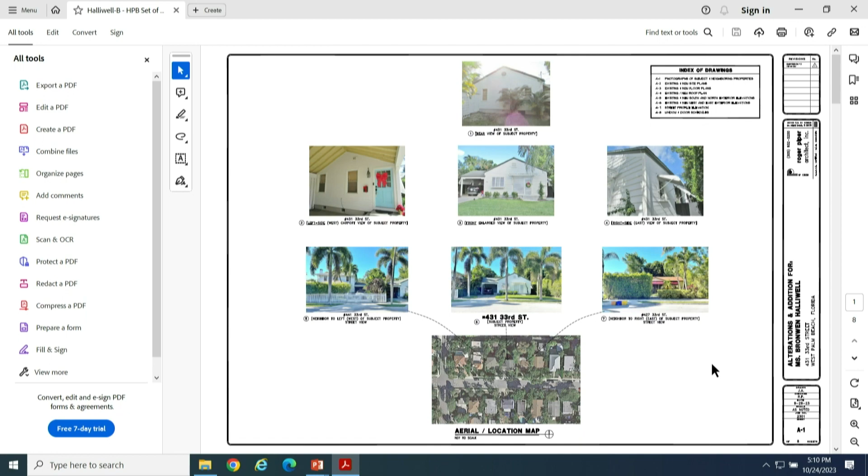The recommendation by staff was for a two-story structure, lowered by roughly 3 feet. However, the board suggested a one-story and or a detached accessory structure solution and wasn't in favor of any two-story solution during the presentation. We went back to discuss all input with the owners, and we are now proposing to you this one-story design.

As this meets the needs of the owners and accommodates the input and concerns by staff and you, the board, achieving staff's approval for a one-story building addition solution as designed is very important to us here. I'd like to do that. However, we're not in favor of staff's approval conditions for the following reasons.

Let's go to the rendering. Please refer to the rendering you might have in front of you. Here it is on the board. It will be obvious that the height of the new gable roof is not a significant issue, as it's barely noticeable when viewed from eye level across 33rd Street.

This is the existing home, existing carport. Lowering the new roof by 1 foot would reduce the distance the roof was raised from 2'5" to 1'5". This would create a very tight condition between the existing gable roof in the front and the new gable wall of the addition. This pertains particularly to construction means and methods.

Also, per the staff report, the additional gable intersecting—let me go back to the front—is referring to the small gable that extends over the new laundry room and ends at the existing carport. This roof area can be seen in the roof plan, on sheet A4.

You see that okay? I was going to blow it up. This is the existing, this is the addition, and this is the addition over the existing laundry room.

Also, you can see this in the south elevation on sheet A5. While this is a plan view depicting the elevation heights, the rendering is more accurate to understand when walking down the street or across the street. Due to the geometry of the building and the roof, in this area we do not believe that there is another roof profile that would work best with the existing roof.

Again, as you see in the color rendering of the front facade, the small gable is barely noticeable when viewed from eye level across the street, across 33rd Street. Therefore, at this time, we're asking for approval for this one-story design with no conditions.

Thank you. Thank you. Questions of the applicant?

Yes, I have a question. Can you talk about your reorientation of the front entry door? Let's go to the front. It's not centered currently, correct? It is not, this is existing. If you go to sheet A5, so you're installing it in the center and putting two side lights, side panels?

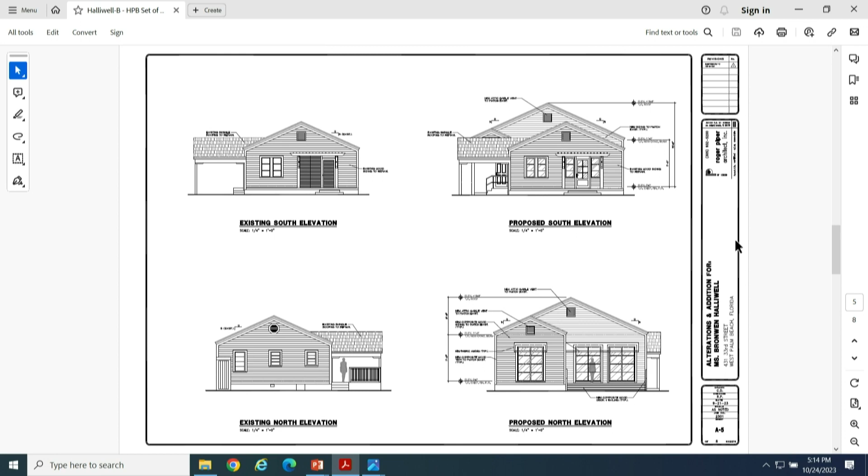Correct. Where do I increase the— the trellis element is an existing condition, right? How do I make this larger? The front trellis? There's existing, and this is new.

I'm sorry, your question? Maybe that's helpful. And so behind those kind of Bahama shutters, currently floor-to-ceiling jalousie windows? That's what's existing, right? And you're proposing kind of like a little knee wall and new windows—impact windows, not doors.

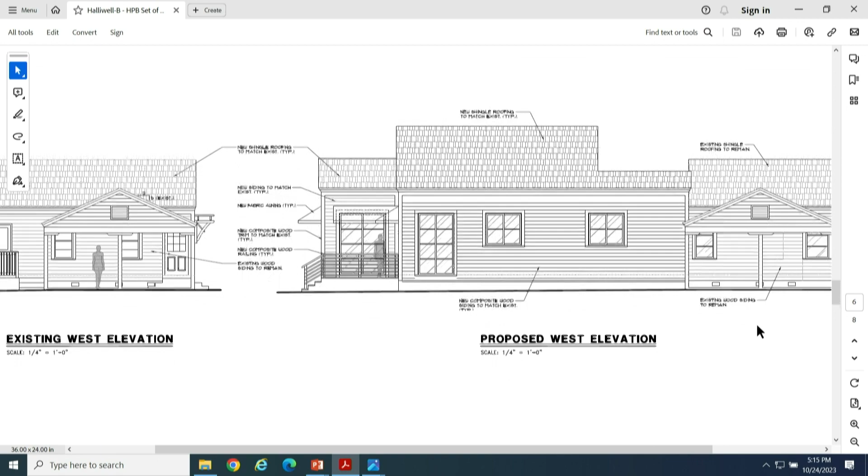Well, I think your improvements are just that, a great improvement from what the proposal was. I'm glad you really listened and your client was amenable to our input. I think the proposal is super. Terrific, thank you. Yes, I think that was well worth the exercise. Thank you.

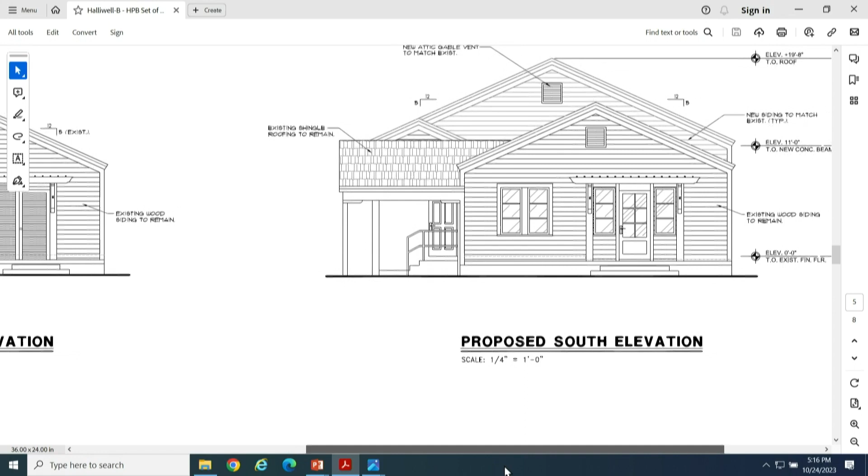Any further questions of the applicant? Yes, in the proposed south elevation, you are showing one type of railing, but on the other elevations you are showing a different type. Can you explain which one it is, please? Let me see—vertical or horizontal? Well, in the south elevation there is only one, that one. The one on the left has a railing that doesn't have the horizontal, only one horizontal, and the other ones are all different.

We'll take direction from you if you like. We'll just go by what code allows unless the owner has a preference.

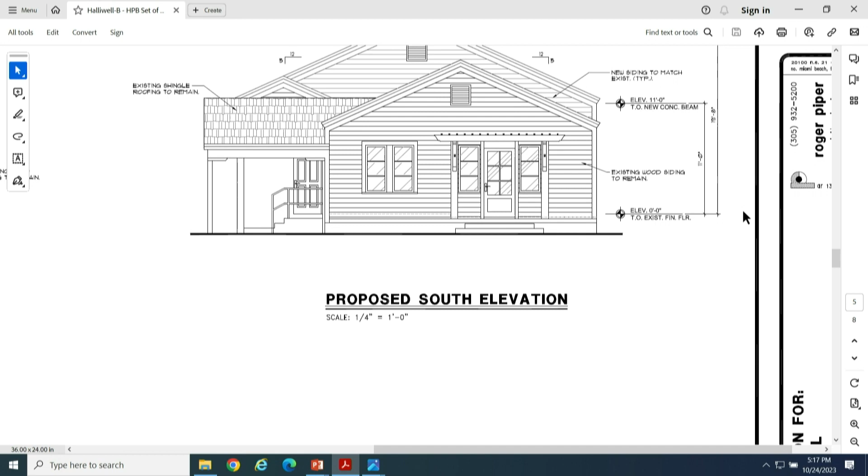And the other comment that I have is, would it be possible—if you look at the floor plan, where the new wall meets the old wall, usually what the guidelines call for is a differentiation there. So usually what we request is that wall is pushed back a few inches, not a reveal, but an interruption in the facade to show what is historic and what is new. Would it be possible to push that back?

To push it back, or how we're differentiating it is with height. Or with materials, but you are using all the same material now. I understand that you are changing the height there, but there should be a vertical differentiation also. And what's the example of how to show that? Pushing it back, meaning making a separation? Is making a differentiation in the wall—so instead of being on the same plane, one wall would be a few inches behind the other one. So the house will become a few inches smaller.

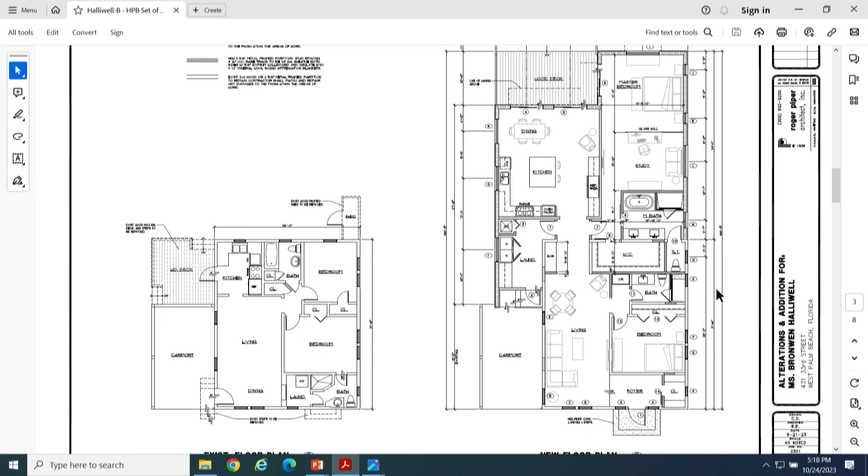In the past, Ms. Mittner had recommended a score line, not necessarily as best practice, but something acceptable. Given that this is a different type of exterior cladding, I think something similar could be achieved with the siding itself, not a corner board, but something similar to differentiate it. That way you're not having to change the overall structure to accomplish that.

I think that would be really important on the proposed east elevation, where the old wood and new composite are blending together. There's an opportunity for some sort of delineation with the addition, using different materials to separate the two. How confident are you that the existing wood and the composite will blend together?

And if not, what was the idea behind it? Maybe not trying to match the materials, but to show something different with material. Good point taken. Any further questions?

Okay, thank you. No, thank you very much. Thank you, I'm going to leave it on the very nice rendering. One more good look. There you go. Thank you.

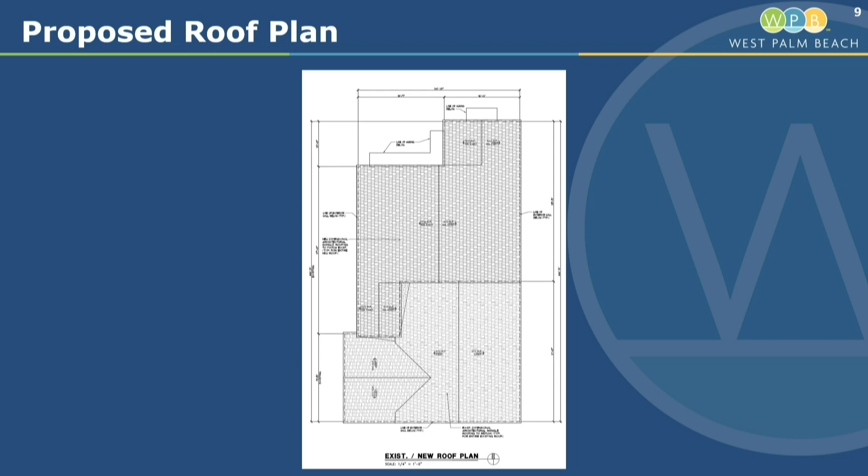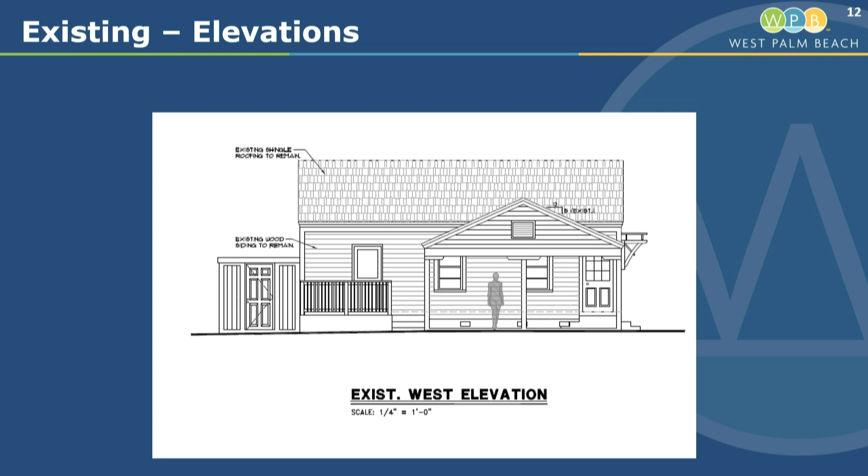This is the proposed site plan. As you can see, all of the additions are to the rear of the existing structure. The existing floor plan and the proposed roof plan, the existing elevations, and the proposed, where you can see the entire addition is set to the rear. The west elevations, north and east.

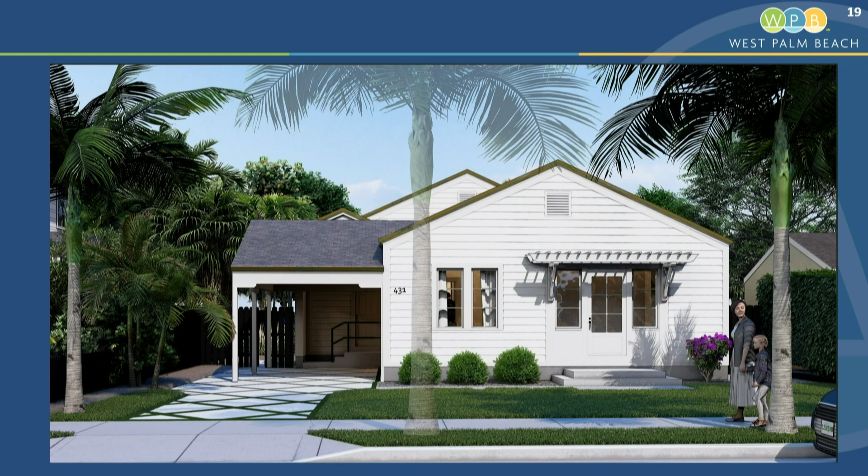And the streetscape, the home at 427 is a one-story, and 441 is a two-story, so this obviously fits in between those two heights. Here's the rendering that the applicant provided, and the rear rendering. We believe this does meet the applicable codes and the Secretary of Interior standards.

We are recommending approval with the condition that the applicant referenced. When that condition was written, I had not seen the rendering provided today. I think that if the project looks like the rendering, I would be fine with eliminating the condition. If it's going to look more like the elevations, I think the roof and height need to be restudied. But with the applicant's guarantee that it'll look more like the rendering, I'm okay with eliminating this condition. Thank you.

Questions of staff? Okay, thank you. Do you have any members of the public who wish to comment on this project? Seeing none, we'll go into executive session. Any discussion, or would someone like to make a motion?

I'll just add that I do feel the rendering is convincing in terms of the gable condition, as Ms. Hamilton mentioned, so I don't feel that needs to be a condition based on the evidence provided. It sounds like we're looking at two conditions at this point: one, an expression in the cladding of the addition to differentiate the old from the new, and two, a consistent railing design, which I think would be fine if staff just reviewed it once the applicant makes a selection.

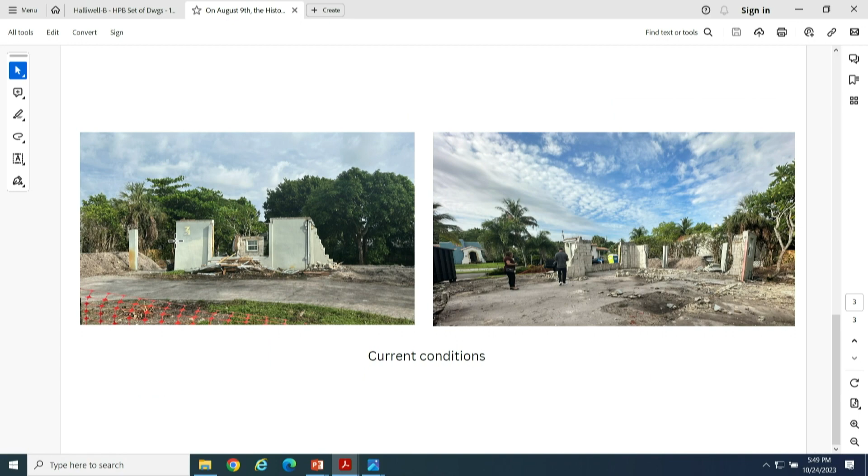Yes, I understand what you're asking. So this photo on the left—is this right here? It's like a little miracle that portion of the wall remained, which is the one portion of the wall that your proposal had the integrity to keep. Correct. Because honestly, I think the proposal really didn't do anything to highlight the historic nature of the contributing structure, in my opinion. I remember when this came before this board.

That said, now that you're kind of free of the confines of the perimeter of the walls, is there a better plan that your team has come up with? Maybe one story, now that you're not bounded by walls that no longer exist, or put in an addition? No—we're actually very happy with the final approval. We spent many months here in front of you and listened to all your advice, and I feel like we accommodated a lot of the requests and ended up with a result we're happy with and proud to contribute to the Flamingo Park community. So we'd like to continue with the original approval.

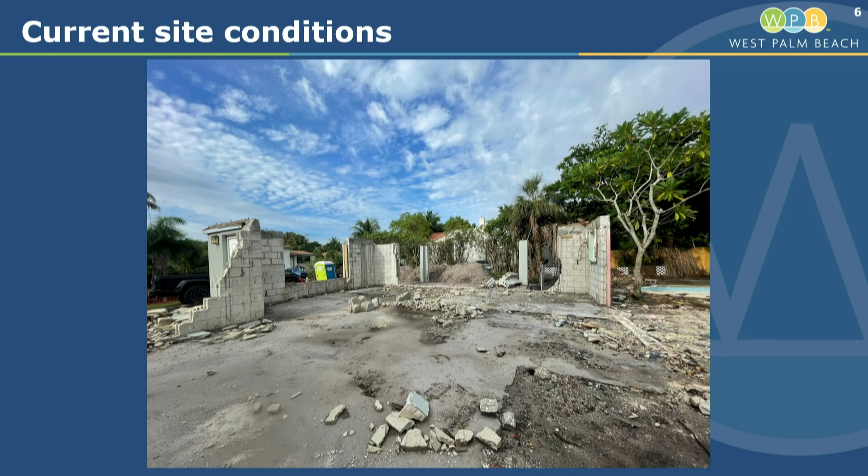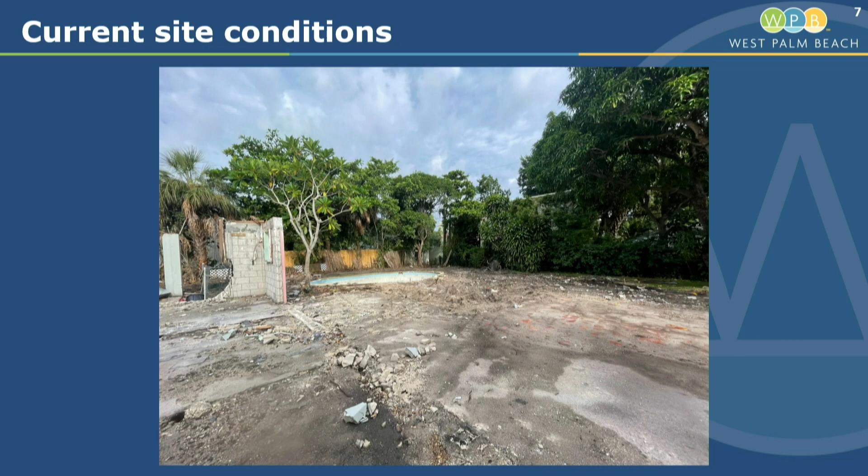This is the current site condition, where you can see mostly that front bay window portion, and a few of the columns from the carport are remaining. However, pretty much everything else of the building was demolished prior to the building inspector stopping work on the property.

The front door is remaining, and not much else. You can see what the applicant was showing, that there clearly was some problems with the walls, but it's hard for us to know without those walls currently existing.

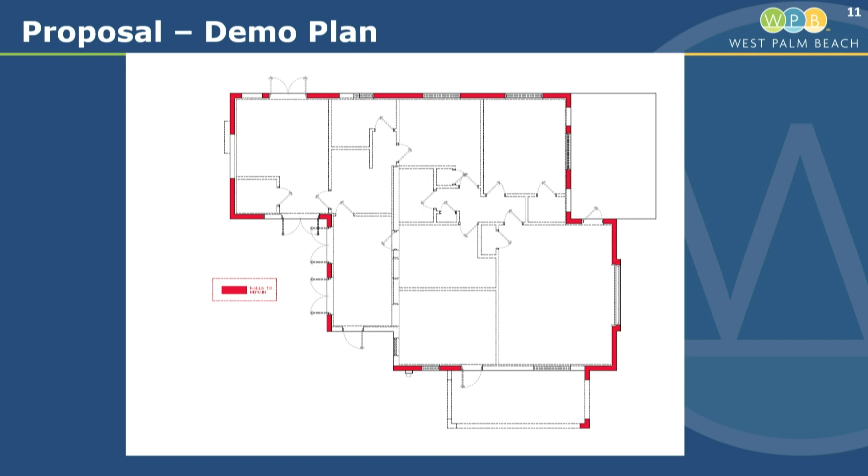This was the proposed demo plan, which again showed in red all of the walls that were to remain. And this is the existing conditions, where really only the front small portion and carport were retained.

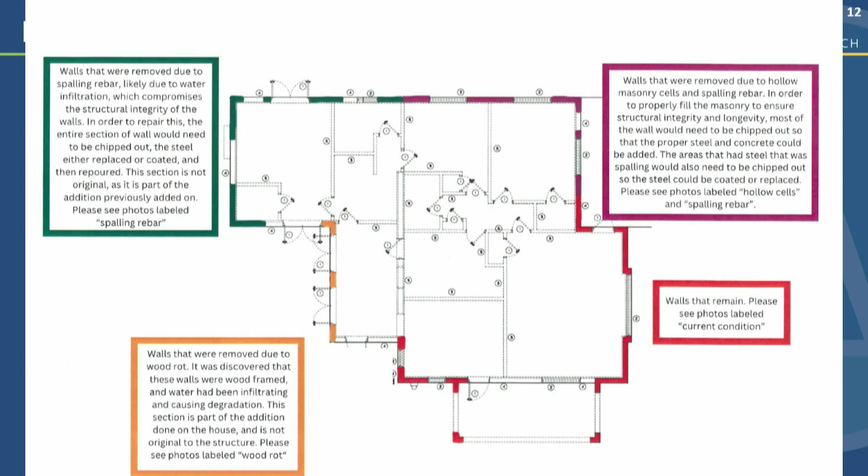This work was all done prior to the issuance of a building permit. Historic had not signed off on their final permit. Therefore, any work that was done was without the issuance of a permit. Although they did go before the board for approval for this project, it far exceeded the scope of what was originally presented.

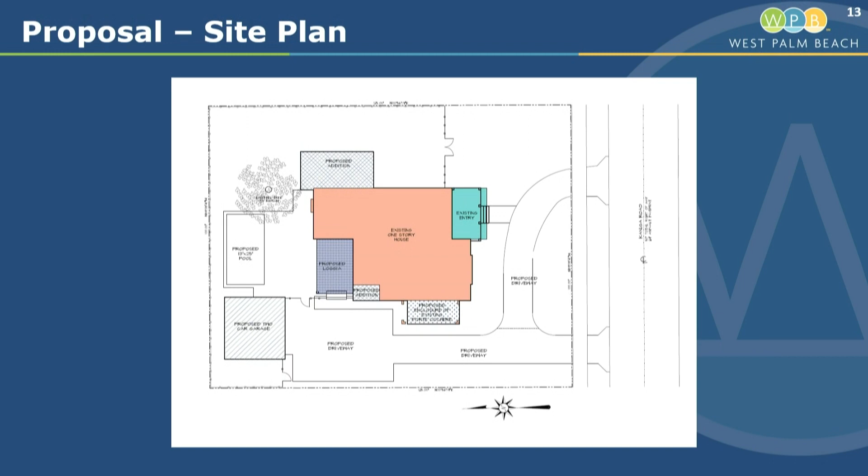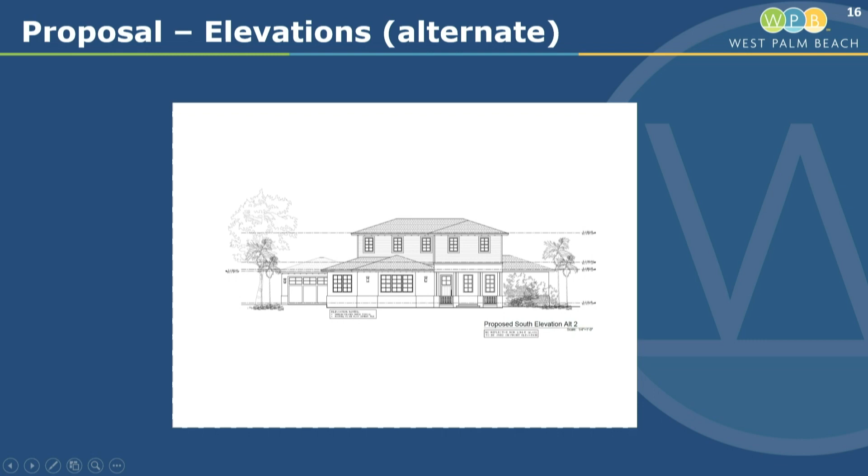This is the approved elevation. As you can see here, that portion of the home that was called out was probably the most prominent portion of the home to remain. But there were still some walls that we were supposed to retain.

Just a quick timeline. Originally, in January 2022, the applicant came before you for case numbers 2206 and 2207 to completely demolish the home, split the lot, and construct 2 new homes. This was denied by the board.

They then came back with the approval that I just showed you. That was heard in August 2022, September 2022, October 2022, and November 2022. It was approved at the November 2022 meeting.

The applicant did submit for building permit in May of 2023. I will say they were pretty close to getting it issued. When they did the work prior to receiving the permit, on October 4th it seems their crew came in and demolished most of the walls.

The building department did cite them on October 5th for complete demolition of the home without permits. And also, Historic did add demolition by neglect, since that's our main code section that we can cite them for. As you can see here, these are the 2 sections of the Historic Preservation Code that they were cited for.

Section 9448E: Maintenance and repair of designated properties required. All designated properties, which this is a contributing structure or any portion thereof, shall be preserved against decay and deterioration and kept free from structural defects. I believe that demolishing the structure probably doesn't fall under that.

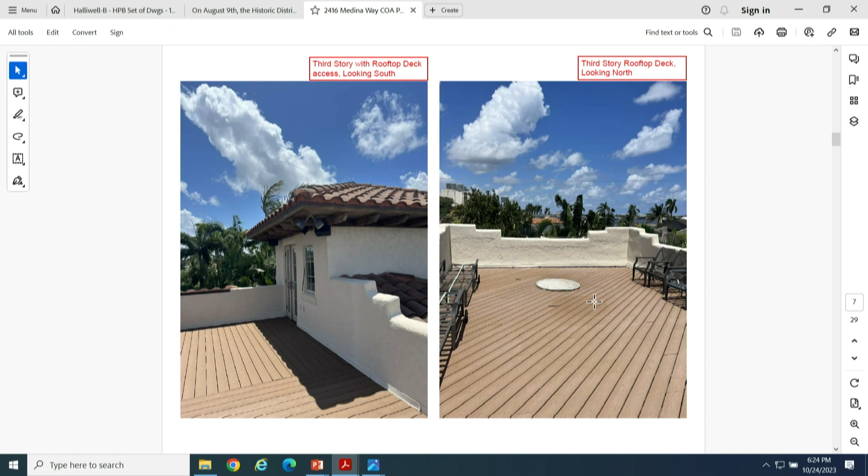It's actually pretty well buffered line of sight — they only get a clip of the water looking northeast. There's new construction going up on the east of this property, as well as the west, the northeast, and the southwest. This entire area is getting redeveloped, or let's say it's changing.

I'd like to let Walter describe the design precedents as they relate to this project.

Good evening. So as Russell briefly mentioned, one of the goals of the project is to actually expand the third story habitable space over that roof deck to make it a little bit more usable. There's also a proposal to extend the second story, which we'll get into shortly.

Just want to briefly review some design precedents. I know third stories are not the most abundant thing, but they do exist in the neighborhood, and we have a few examples to share. This one is the furthest, but it's larger than our proposal, at about 400 square feet approximate. This information is taken from Google satellite imagery, Google Street Views, or our own personal photos, but the measurements are relying on the satellite.

This is 211 Grayman, a third story. This is on Flagler, another third story, almost 300 square feet. This one's close to the property, at 380 feet away.

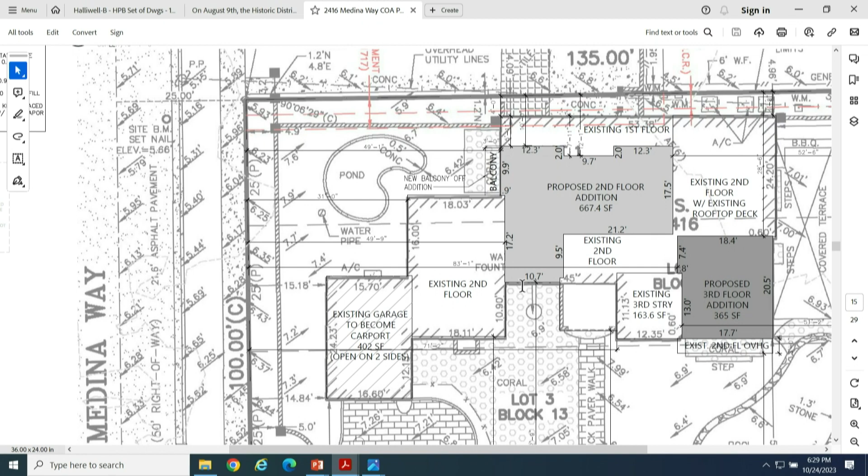The other proposed 3rd story or loft level addition is 83 feet 1 inch from that front lot line. And I'll have renditions to show you how that appears, being so far back.

What I'd like to bring your attention to is on this front streetscape elevation, the property to the north of us, and actually most properties on this street on both the east and west side of Medina, are actually north-south orientation with their front entries facing the street. This home, 2416 Medina Way, uniquely with the 135-foot depth, 100-foot frontage, is actually east-west orientation.

You don't see the front entry. So the home actually has a narrow massing that you'd see presented to you, even when driving by or walking by. So that will be maintained in our proposal.

Our demolition plan shows removal of the stairs and the stair tower. They're kind of funky, and we were kind of making the floor plan more porous to allow for more natural light within a very large open living room that doesn't have currently enough natural light to it.

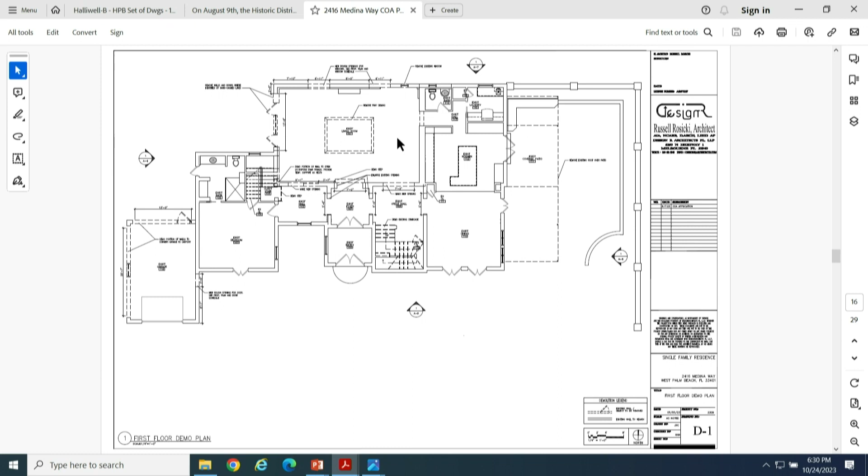Feels a little cavernous. The second story floor plan, as you see, is biparted by kind of a rooftop and open-to-below section. So you're kind of stuck on one side of the home versus the other. On the left side of the home, again, is the original 1941 structure.

At the loft level, this is the demolition we're proposing. Currently, you walk up the stair, you're at a wet bar, if you will. It's essentially rather small. It leads you basically directly out to the rooftop.

The proposed design on the floor plan shows more natural light entering through proposed new windows. Basically at that stairwell, we've reconfigured the stair. We've added more glass. We've made sense of the windows and the spacing of the openings on the first floor.

The second floor, you're seeing the proposed addition with the dark walls. You're seeing the 2 bedrooms with ensuite bathrooms. I made for a design that allows a hallway to gain access to the other side of the home. It being at a different elevation than the original structure, we have a series of steps that lead down, and you're kind of walking around this open-to-below, making your way to the west side of the home. So now the second floor is connected.

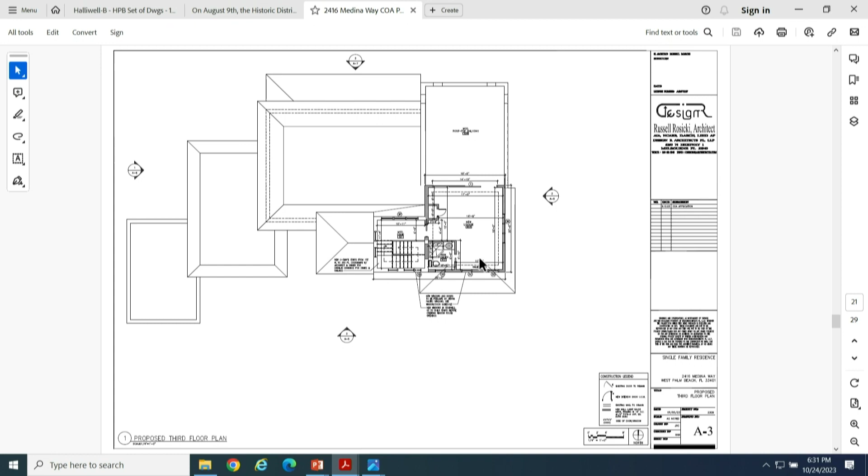The proposed addition on the 3rd story measures 18 feet 5 inches wide by 20 feet 5 inches long. It incorporates a full bathroom, smaller size bathroom, and essentially, we're calling it a lounge. It's a sitting area where they might be able to enjoy the rooftop a little bit more.

We're not elevating the roof with the proposed addition on the third level. We're actually reducing the ridge height slightly with the replacement of the trusses and barrel roof. We've taken an average grade at the front of the home consistent with city standards—essentially the average grade at the frontage of the structure, that being the highest grade—and taking that across allows us to maintain the maximum height as proposed at 30 feet to the mean roof height.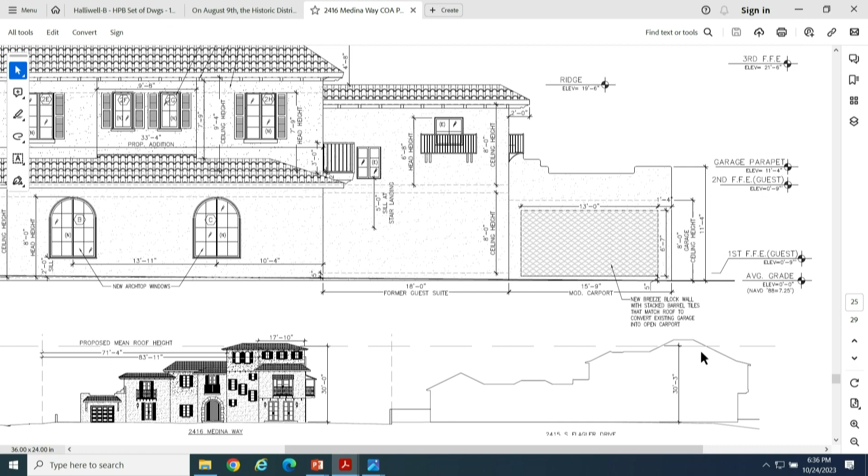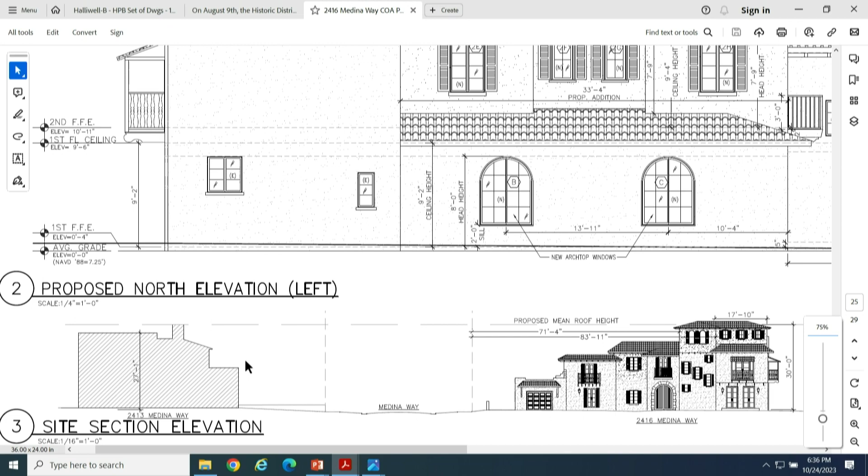I can't say it's guaranteed, but within the realm of a few inches higher than what we are proposing, because it's on the flood elevation side. The flood zone kind of stops or meanders around this existing structure on the east side. And then across the street, we've taken that dashed line and drawn essentially a cross-section of that other new home that was just built.

What you're seeing here at the elevation above, the site section, is actually the north-facing elevation that faces the original structure. These are the two arch-top windows that allow more natural light on that north face, and then you're seeing the windows for the bedrooms and the windows for the bathrooms between, and the breeze block or stacked barrel tile at the carport.

Here's our cross-section. We have a first-story ceiling height—it actually varies, as the grade varies across the site. It starts up higher towards the west side and tapers down towards the east, as you can imagine, with the flood zone being more eastward. 8'10" ceiling height on the first floor, 9'4" on the second floor, 8 feet proposed on the third floor.

We went ahead and did a 3D sketch model showing the home. We've added shutters to all the windows to add more decoration to the home. It kind of yearned for it, in my opinion.

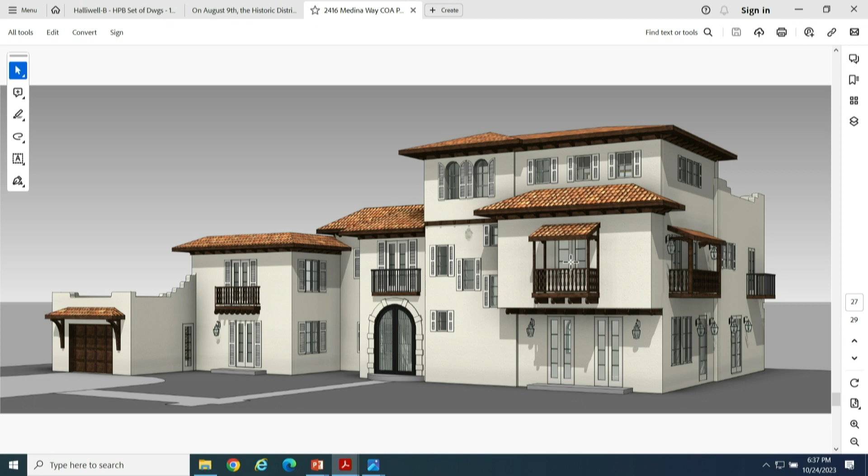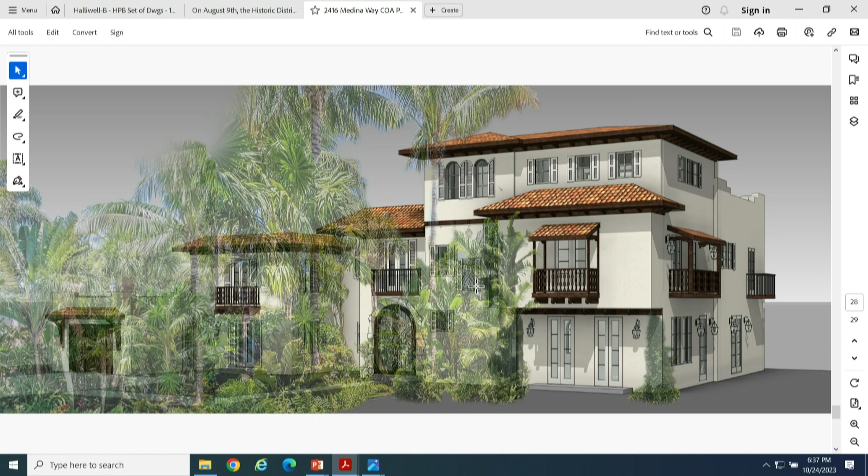This is it with a partial landscape ghosting the house, just to show you in terms of line of sight. This would, again, barely be visible from the west, essentially not visible from the east. It would be lower than the new home structure going up. And from the north, it's comparably massing in size to the original home.

This is from the west view, or I should say northwest, looking southeast. With the carport structure, this would be the front facing to Medina, French door side lights, the third story addition, the original 2-story structure.

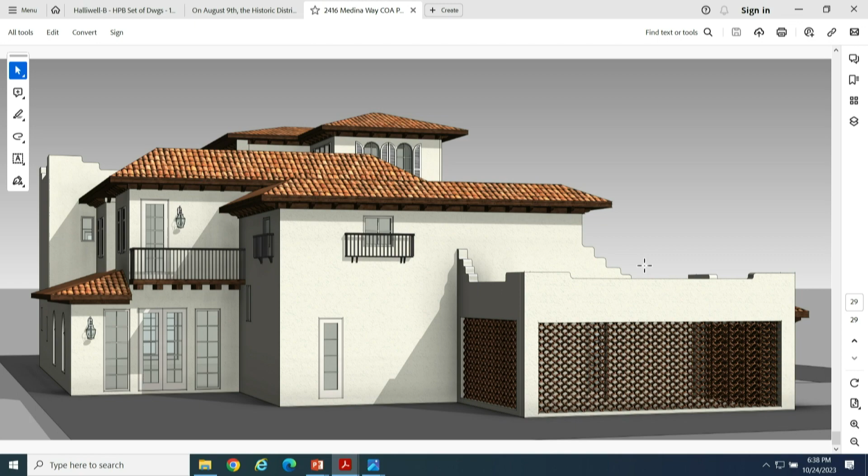And that concludes our presentation here. Questions of the applicant?

Yes, Russell, thank you. Are you removing the roof to accommodate the new addition and reinforce it? Do you have a roof demolition plan? No, I don't. I do have a proposed roof plan.

And that would signify a new roof. Yeah, over the section indicates a new roof. Yes. That's the new hip roof over that third floor. I'm referring to the second floor ceiling. Oh, so you're asking if we have a cross-section through the second floor ceiling where there's a roof?

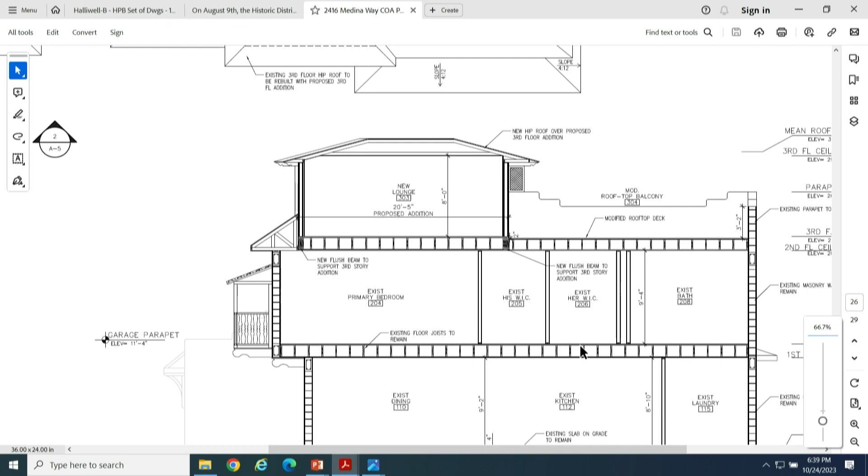The modified rooftop deck, is that, how much of that second floor roof is being removed? If I understand your question correctly, I'll go to the plot plan, which identifies areas. So the rooftop deck, it's an equal exchange, right? The proposed addition up here is 365 square feet, so that would be a subtraction of 365 square feet of that flat rooftop deck.

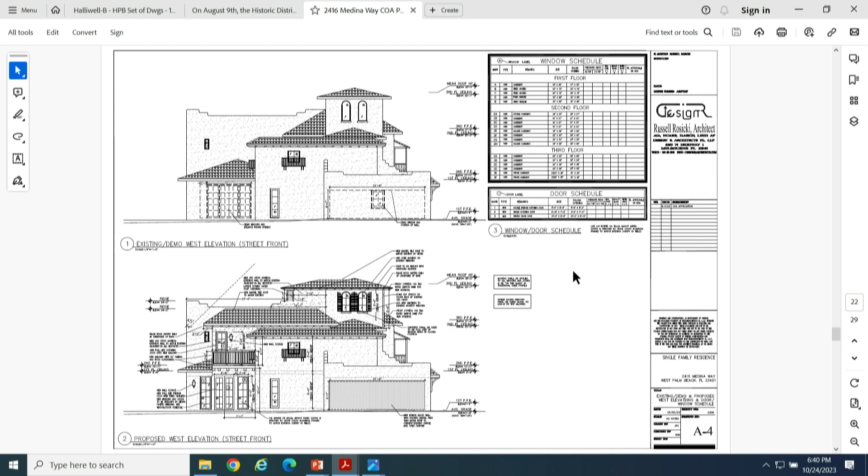Can you speak more about staff's condition about the green bonus? Yes. And I'm sorry for not stating that.

We've made all updates to the drawings consistent with the recommendations from Anne. Specifically for green design, it's kind of been commonplace for us. Obviously, we were requesting that exception. At the same time, the standard for us in terms of green design, we tend to do more than 3, I guess would be the minimum standard for the green design request. So the first thing we do is we design or specify on the drawings Energy Star appliances.

We specify, and this is captured in the green design notes, but I'm just summarizing it, low flow faucets, 2.0 gallon per minute faucets, same with shower heads, low flow toilets, 1.2 versus 1.6 gallons per flush. We also request energy efficient lighting fixtures throughout—no incandescents, no halogens—and we would specify those fixtures on our plans.

All new pavers, we request them to be pervious if they're exchanged or traded out adjacent patio, so that there's more infiltration of stormwater. We super insulate the building envelope proposed for the addition, so that in combination with energy efficient mechanical systems, the zones can be efficiently designed with smaller size mechanical systems that actually reduce energy usage. And the solar heat gain coefficient, this not being a contributing home, would achieve the minimum standard for a new home, which would be 0.25 solar heat gain coefficient versus 0.4. Essentially, everything that's not street facing would receive low E for energy efficiency south facing.

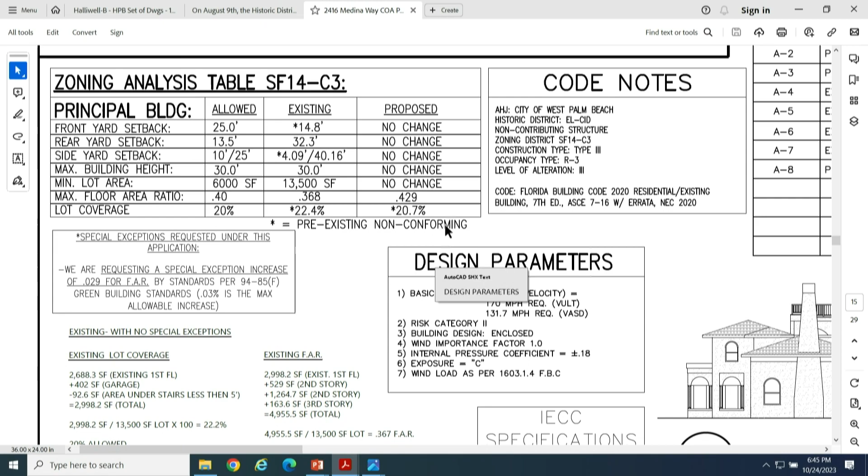Thank you. And then as far as the breeze block treatment on the garage, I think that's the first time I've seen that, and I just want to ask, do you have any historic precedent? I think I've seen it on terraces and things like that, but not in such a large application on multiple walls. Yeah, great question.

So if you've passed by 294 Cordova Road, Revival, that's the Lavin family who owns it. In their carport, we used the same design. It was actually recommended by Frederic at the time because that was a carport, but it just looked very shabby, so the idea was to make it look more consistent with the architecture. It was recommended by her to do the stacked barrel tile.

At that time, I had sought approval for a specific type, a recommended Pueblo stacked tile that was a more decorative pattern of breeze block. She said, no, that really doesn't cut it. The homes we have in El Cid typically use stacked barrel tile. The code allows for a lattice, an open lattice structure. So essentially, we'd be amicable to that if that's what the board requested, instead of breeze block.

I just think breeze block is more luxurious. It looks better, especially if it's consistent with the roof on the home. And it does allow the porosity, which you really can't enclose later, right? Because how would you mortar between stacked roof tile, right?

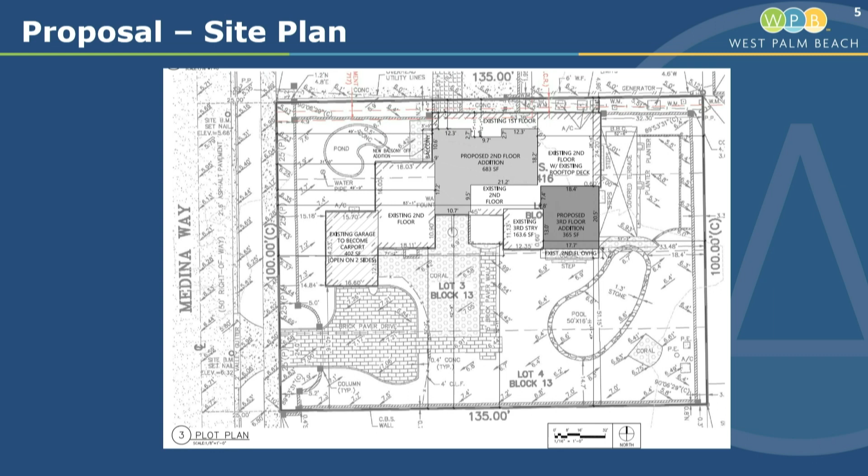The request is additions to the second and third stories of the home, totaling approximately 1,048 square feet between the two levels, and a change of the current garage to a carport with breeze block walls. This is the site plan where you can see where the proposed square footage is being added and subtracted from that carport. This is the proposed demolition first floor plan. As you can see, the actual original space that was a guest garage or guest suite, located here, is actually remaining fairly untouched.

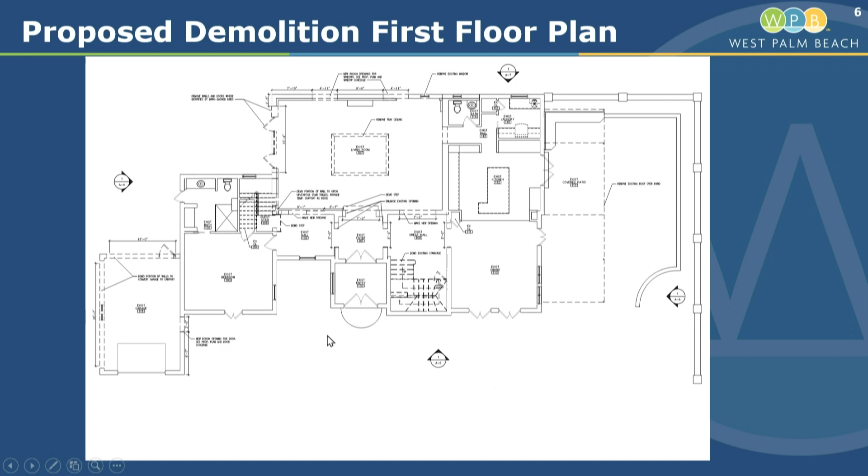This is the second floor demolition plan. The applicant's proposal is to connect more of the second floor together. Then on the third floor, there is an existing small lookout area and fairly large rooftop deck. The applicant is proposing to expand that upstairs third floor area and reduce the size of the rooftop deck.

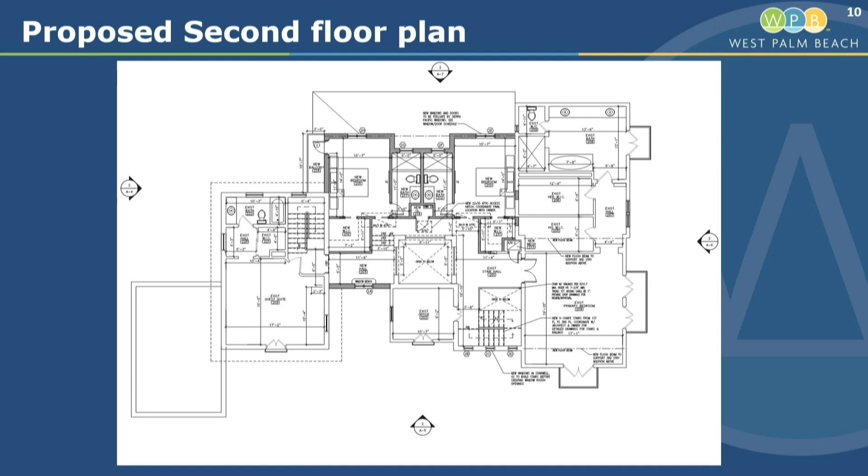This is the proposed first floor plan, proposed second floor plan, which does include connecting those spaces with a stair access, and the proposed third floor plan. The elevations, which do show the inclusion of a barrel tile wall.

If the board would prefer to see a lattice or completely open carport, I think that does fit better within the definition of a carport. I will say the applicant is correct. In the past, the department's general recommendation has been that this is acceptable, but I think for a more true definition of carport, it might not include a garage door.

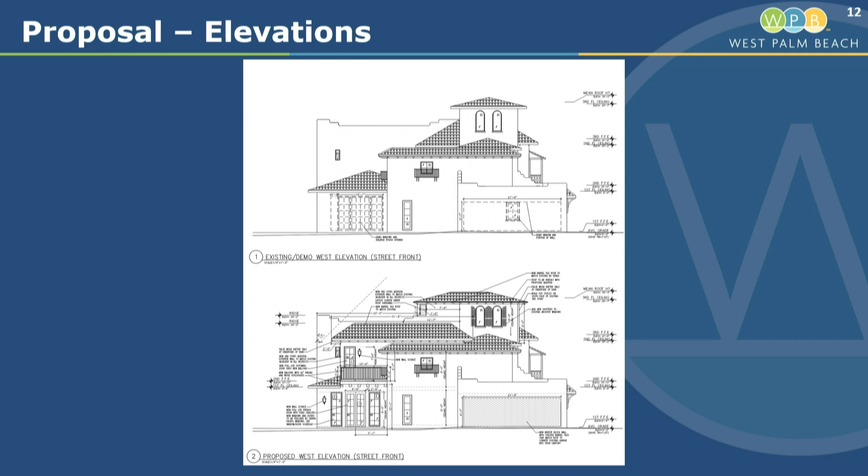This is the south elevation, the east elevation, and the north elevation, and that roof plan. These are the renderings that the applicant showed of the project.

We believe that this alteration does meet all codes, and are recommending approval with the conditions that all windows shall have clear glass with white frames and ogee muntins, low-E coating permissible only on non-street facing elevations. The second story addition shall be pulled back an additional 8 inches to comply with setback regulations, which the applicant has already done, and that the application shall provide more justification for the green bonus being applied towards FAR.

In general, not opposed to the applicant using that bonus, particularly since they aren't utilizing any other bonuses. We do offer them for being one story or for constructing an accessory structure. However, site constraints, I think, would make it a little bit difficult for the applicant to construct an accessory structure instead to utilize that square footage. So I think it's a fair exchange to allow them to do the green bonus.

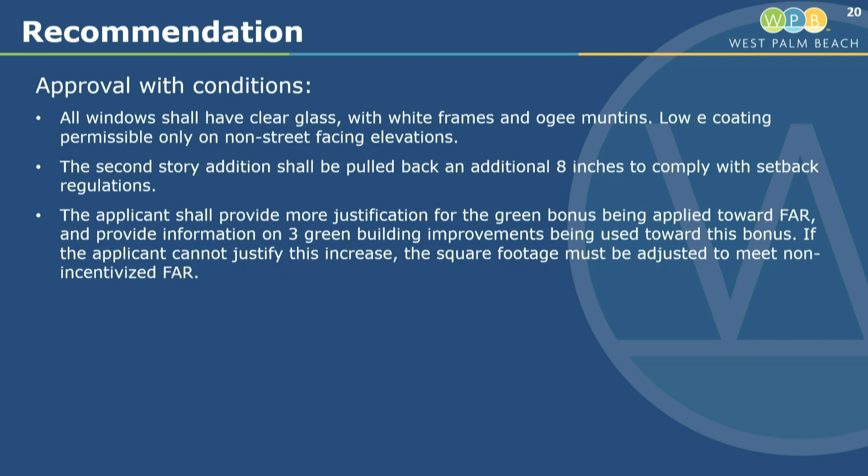Just was looking for a little bit more information on what exactly was being proposed there. Ms. Kellogg is correct that you can apply it either towards FAR or towards lot coverage. It is something that we utilize not terribly frequently, but it is something that we have applied on projects in the past. Thank you.

Can you put up the south elevation? Maybe I'm missing it, but I don't think it's in our packet. Does anybody have it? I think we just have the east and west elevation in our packet somehow. Okay, would that be this one? Yes, thank you.

In your knowledge, has this board ever approved a third story addition? Off the top of my head, no. I can't think of any cases in the 2 years that I've been here. Thank you.

And I'm going to continue that. Does this zoning district have a height limitation? It is that 30 feet, yes. And their proposed height is at? 30 feet. And does the zoning district have a number of floors limitation? No, we just measure by height.

I do want to just add to that conversation, because my understanding of this zoning, and I was actually just pulling the code up, section A talks about intent, and it refers primarily to 2-story and 1-story buildings. Obviously code is open to interpretation, but my understanding, and also in conversations with various people at the city, is that the intent of this code, even though it's not specifically listed out, is relating to 1- and 2-story structures. So I just have significant hesitations about expanding on something that feels like a nonconformity.

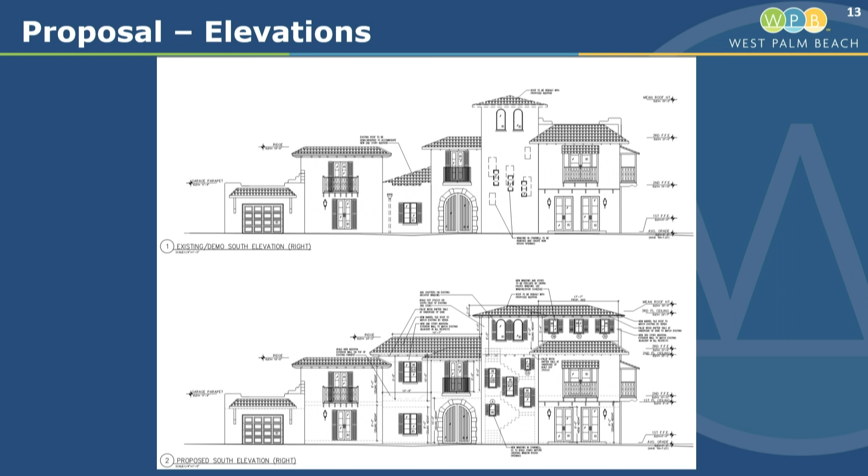Would anyone else like to weigh in?

I can try a motion. If there's no further discussion...

Ms. Hamilton, what is the next Historic Preservation Board meeting, the date certain? Our next meeting will be on November 28th. Thank you.

So I'll try that up, the motion. I move that the Historic Preservation Board continue case 23-59 for 2416 Medina Way to the November 28th Historic Preservation Board meeting to restudy or move the massing of the third story addition to a different location.

Do you have a second? Second. All those in favor? Aye. Aye. Any opposed? Okay, motion carries.

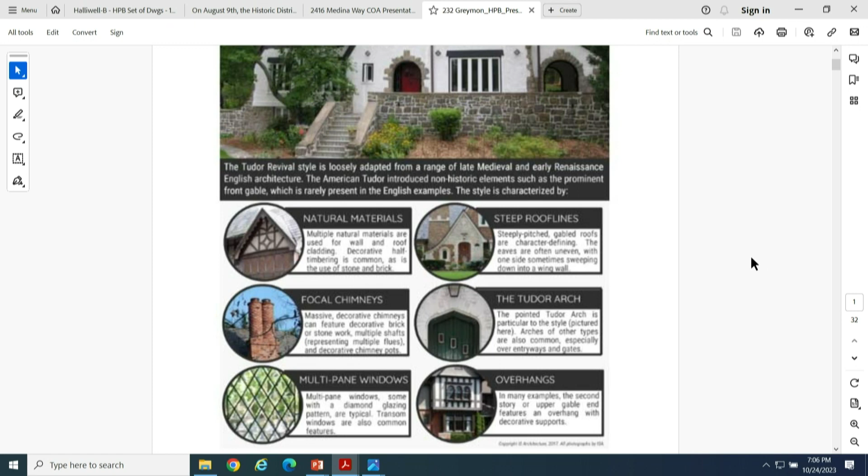This is an additional graphic. Primarily I just want to highlight once again that front-facing gable. Now, the steep roof gable is a form-follows-function situation. These are popular in the Northeast because there's a reason for large chimneys and steep roofs - we want to keep snow off of the house, and we want to stay warm in the winter.

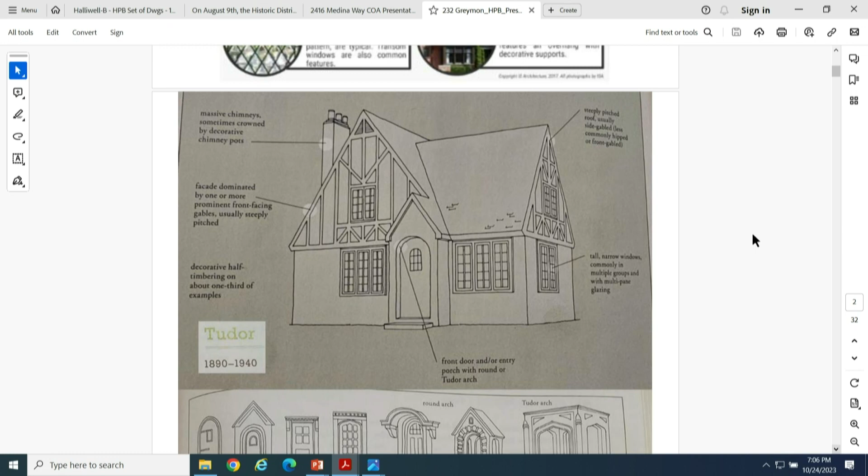Some typical features - a typical entryway. Our entrance that we'd like to actually restore is reminiscent of these first two images. Both single hung and casement windows are typical for the style, and the house actually has both.

So we're going to move forward. Palm Beach County does have other historical Tudors, this one specifically over across the Intracoastal. This was the closest example I have to share with the board of a contributing historical Tudor.

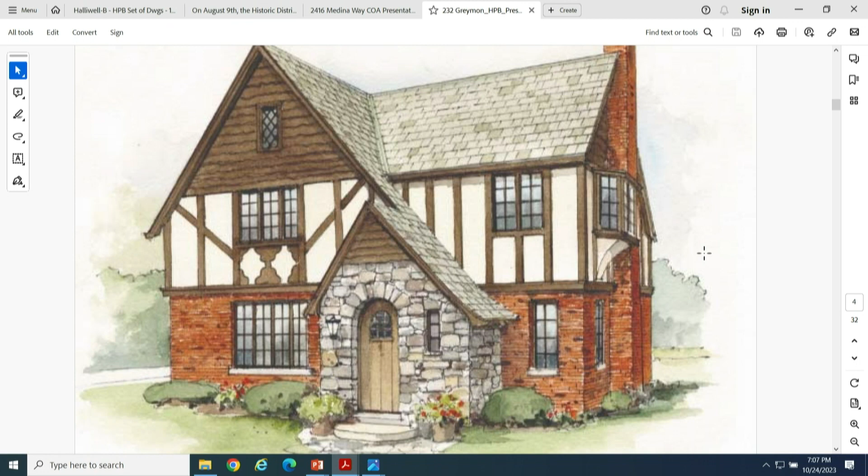And this following image is just a sketch that incorporates all of the Tudor elements that one might find on a Tudor-style house. So this particular house here at 232 Greymon, this is English Tudor revival with a little bit of a Mediterranean flair.

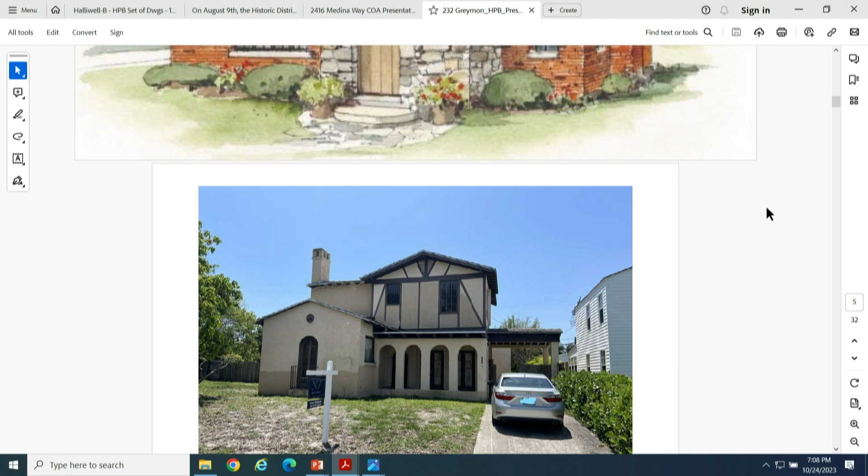The Tudor style has always been a little eclectic as far as borrowing from other styles. This home, as a brief background...

has been sitting uninhabited for at least 10 years, likely more. The prior owner was living in the guest suite while attempting to undertake a large renovation to this property. The new owner is taking it over in quite a blighted state - it has elements demolished both inside and outside and deteriorating.

Tom and Sue are from the Northeast, and they actually specialize in rehabilitating historical structures. They have a lot of experience in Massachusetts, and they are looking to relocate and maybe retire to a sunnier, warmer climate, and they see the potential in rehabilitating this property.

One thing I want to point out before we continue from the front view is that there is an existing arcade-type structure that is non-original that was added to this house. We'd like to restore the original entry, which pays a lot more respect to the Tudor style, which I'll get to in a second. Here is the typical large chimney that you would see.

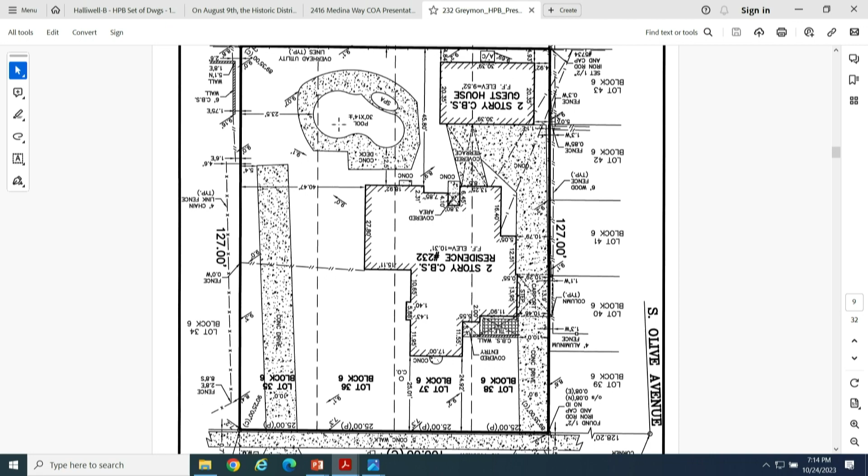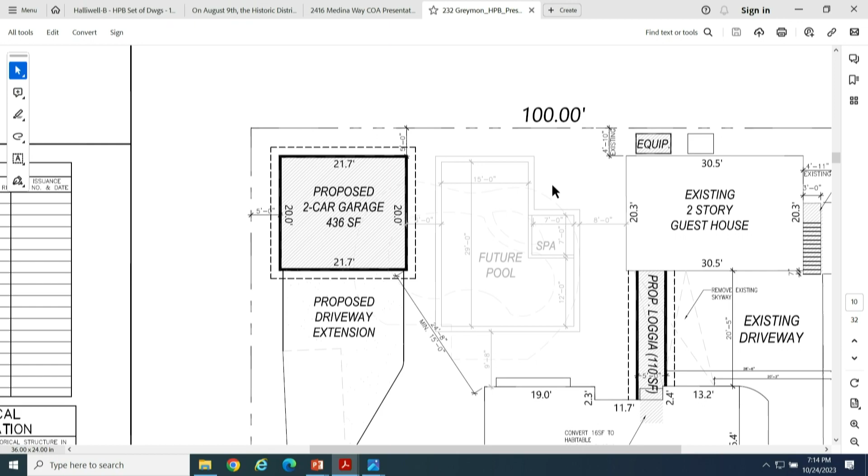This project has quite a few unique features. In addition to being the only Tudor style, it's the only time I've ever seen someone attempt this skybridge type connector. And we know it's not original to the site. Sorry, I'm just trying to get this so you guys can see everything.

When the buyer was considering purchasing this property, they went above and beyond to sit down with staff to make sure they'd be able to put in a garage. The owners collect classic cars, not too many, but they do have a few, and they need a place to put them. They were advised it would be a feasible project, so they moved forward with the purchase and subsequently hired us to assist with a tasteful remodel and accessory garage structure.

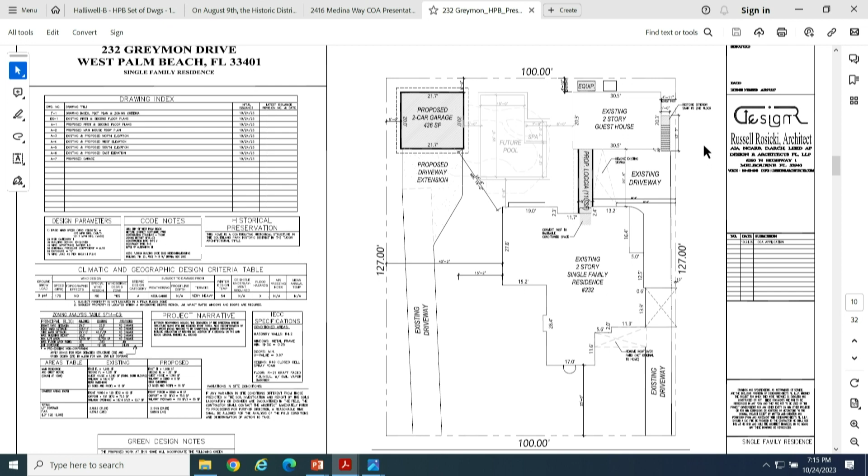So the first thing we had to deal with was the consideration of this skybridge. While it's potentially feasible to try to keep it, it seems inappropriate. I feel it's quite offensive in its mass and size, and it doesn't really serve a great purpose. It just makes everything awkward.

So in order to successfully have an accessory garage structure on this site, we needed to maintain the connector between the former guest house and the single-family residence. We came back to staff with a proposal of an open loggia connector that would essentially maintain these 2 structures as the primary structure, which would allow us to propose this accessory garage.

There is an existing carport that actually goes off the property by about a foot, so we have a pre-existing non-conforming side yard condition. If we were to attach to the primary structure for our garage, we'd have to put the combined 25-foot side yard setback requirement to one side, leaving only 15 feet to work with, which doesn't work for a single car or a 2-car garage. It could work for a single car, but we did a lot of exploration of an attached garage and, to be honest, it was just very unsuccessful.

Before I continue, I want to touch base briefly on the green design topic. Once again, this project is not achievable without that, so we're going to be doing similar things. For example, the mechanical code requires your mechanical system to be a minimum of 15 SEER. We would require 18 or better.

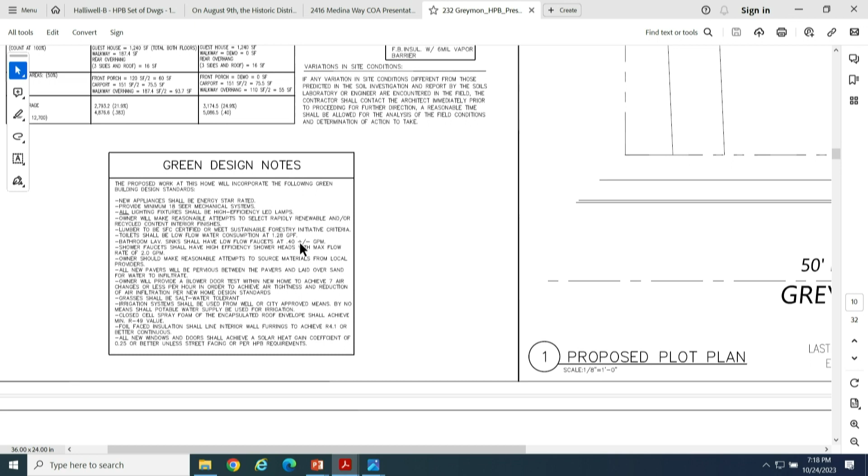Things of that nature we're hoping would be enough to obtain that extra square footage we need.

This is the existing home, a really lovely house with very tall ceilings on the first floor. There are currently no bedrooms downstairs, and the sunroom off to the side has high ceilings with exposed beams to match the living room. The original living room is immaculate, amazing. The second story did leave some things to be desired.

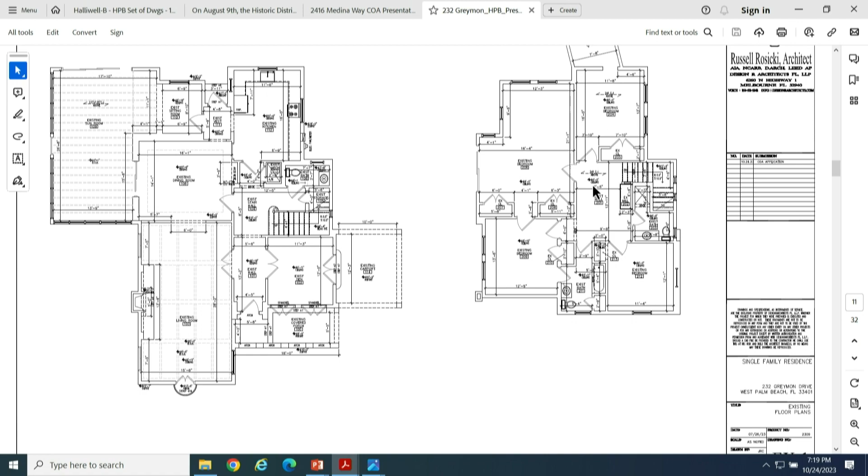There are 4 bedrooms and 1 bathroom original to the home. This is the additional bathroom that somebody tried to squeeze in, but they created a life safety issue, in our opinion, with unsafe height at the stair.

So our proposal is to remove that sky bridge, bring it down to be a loggia to connect the two structures. We're proposing to relocate the kitchen, which requires modification of the sunroom that staff feels was built sometime in the 60s. It is older, definitely not original to the home.

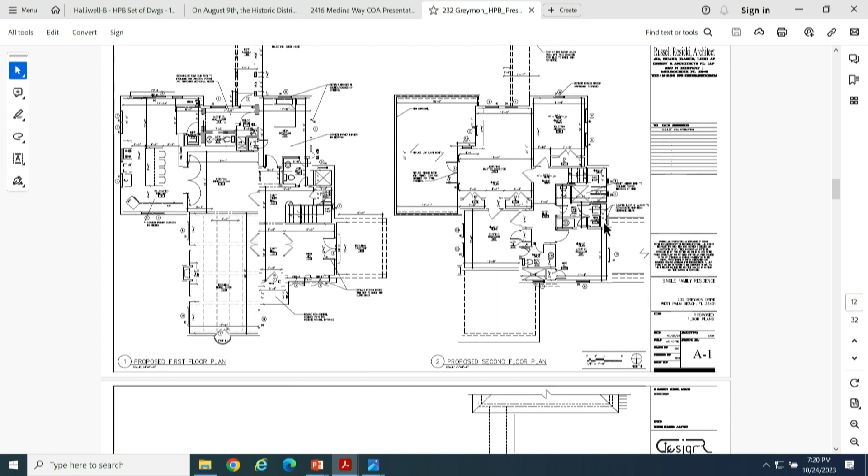We'd like to get a bedroom downstairs for the ease of aging folk, so anybody who visits who isn't great with stairs has a place to stay. Upstairs, there's a minor modification to the front bathroom and a proper bathroom in the middle that fits. A small laundry room will sit on a raised platform, which allows that stair to work. The roof essentially stays as it is at the main house.

To speak to the accessory structure, we are again matching the Tudor style. We're going with carriage style doors, which would be more appropriate for the time, and they'll function as overhead doors. We're going to match the timbering that's typical for Tudor, but also unique to this home. It has its own flair, so we're doing our best to mimic that on the accessory structure to keep with the style.

There was a request to add more fenestration to the former sunroom to make it look more like a sunroom. But in our opinion, it's much more successful if it reads as a proper addition to a Tudor style, since adding more fenestration there was distracting to the eye, making you look at this single-story addition rather than the house. So I feel this is a more appropriate solution, but I'm willing to work with staff and the board as necessary. We did add a railing to the second story because someone added a door. We'll get back into that in a second.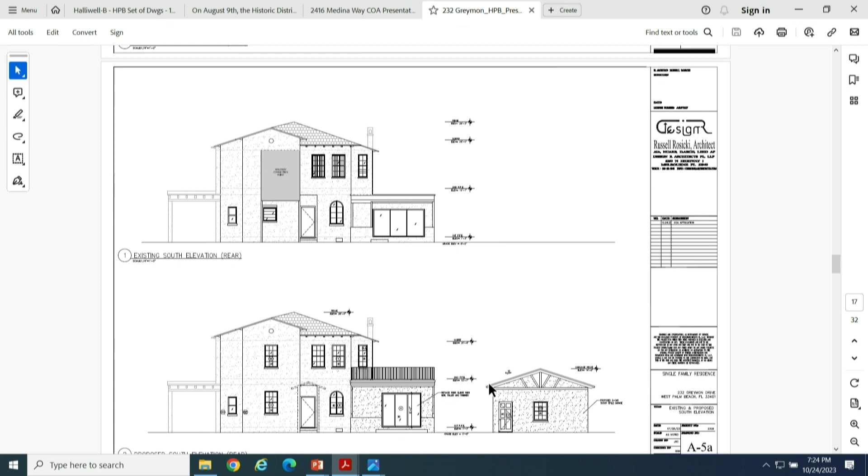And in addition, touch up the cornice on top of this former single-story sunroom addition. It currently just has two pieces of trim - it wasn't much of an attempt to make that look architecturally appropriate, so we dress that up. I'll also note that our garage pays homage to the choice of a thin soffit and small eave with exposed rafter tails. We're matching both of those things as well as the roof material on the garage structure.

Here is the east facade, and here again is that guardrail I spoke of. A staff condition was to remove this slider and make it French doors with side lights. So someone put this in. There's another life safety issue where somebody could end up on top of a roof and fall, so we really need protection in the event that someone walks out there, so they do not fall.

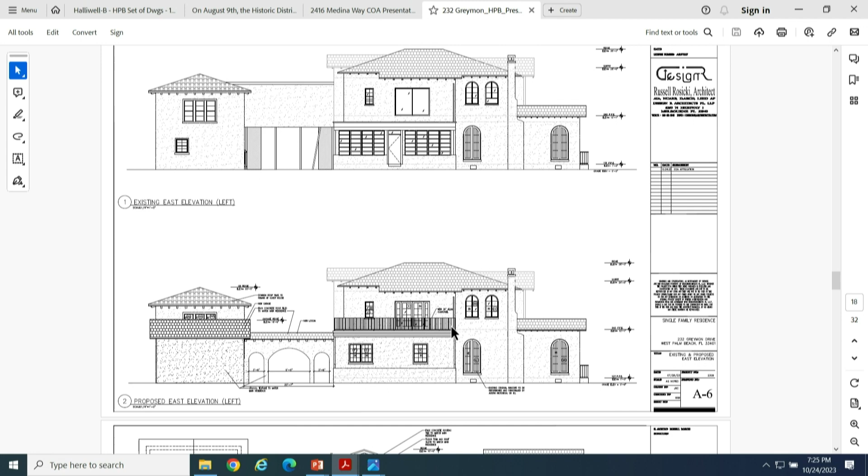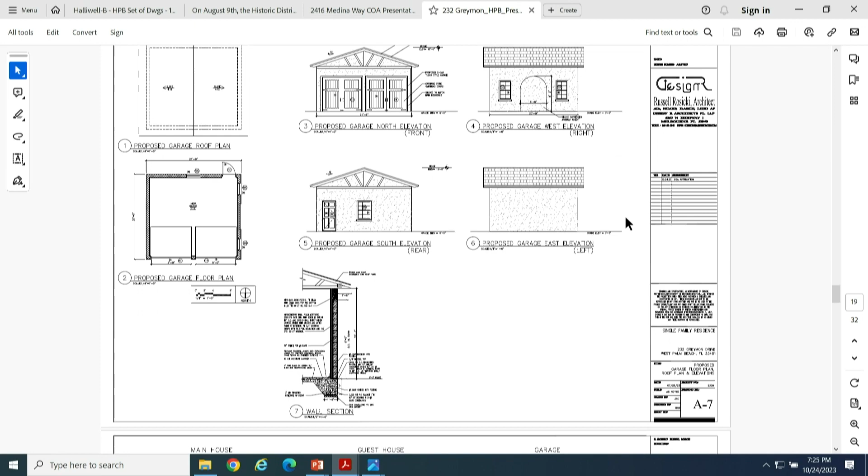Just on the garage alone, here's the 4 sides. Just trying to add a basic architectural element of a stucco impression archway facing a potential future pool, to mimic the arch windows on the houses and the archways of the loggia. The windows are going to be refurbished when and where possible, or if replaced, they will be installed at the garage.

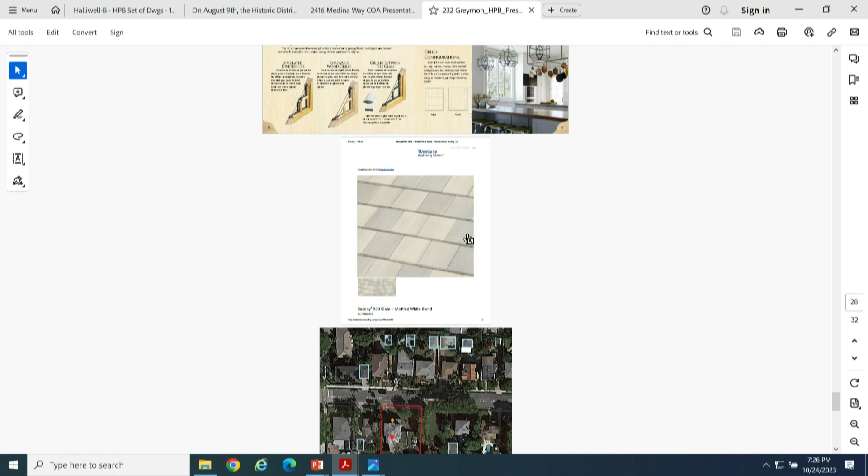We will be using Sierra Pacific windows, which we can get with a wood cladding to match the original wood windows that are here. We'd be going with a Westlake concrete flat roof tile to match what the house has. Due to the lack of upkeep, the roof tile's in rough shape, and even when cleaned off, it's never going to appear to be the pure white it maybe once was. So the garage is proposed to be a little mosaic of whites and off-whites that will do its best to match what the main house will have.

In addition to being here, because this is a historically contributing structure, there's also a variance element related to the project, and that is because connecting the two structures creates a variance for both rear and side yard setbacks.

Now, I would like to point out that if the board did not agree with the connector and the former guest house became once again detached, it would also be non-conforming because it's too large. It's 1,200 square feet and change, so it's larger than the required 1,000 square feet.

So when we approached this project, we basically realized the conditions and variables at hand, and we did our best to guide our clients into accepting what we feel is the least offensive proposal in order to achieve the project goals. Least offensive, in our opinion, is to maintain the connector that almost nobody can see except for the one neighbor to the west, and maintain the setbacks that are already here. The garage as an accessory structure is completely compliant in all regards.

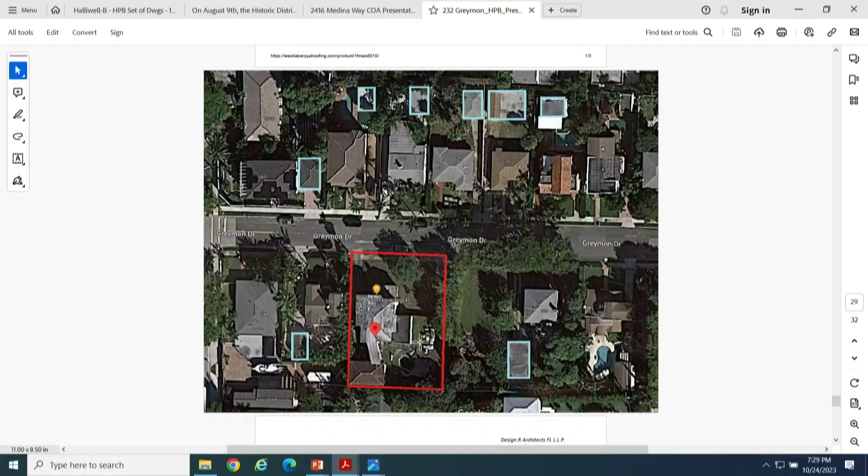Some have detached guest houses; I did not highlight those. These ones are just garages. I'll also point out that in the vicinity of this house, the neighbor definitely has a pre-existing non-conforming setback issue. Both of these corner homes have setback issues, pre-existing and non-conforming. So we're not asking for anything out of the normal.

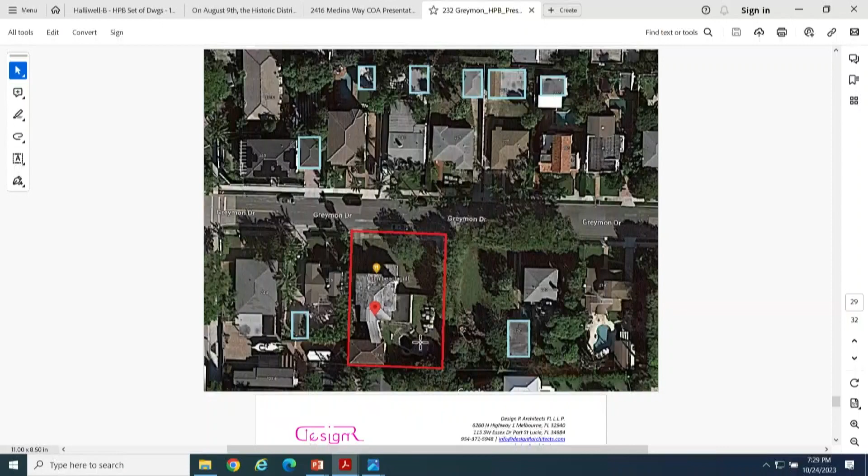I don't want to bore you guys and read this whole statement. Do you have my statements, and have you had a chance to read them, or should I read them in? I don't think we need you to read them in. Okay, thank you. All right, I think that's going to conclude my presentation for now. Great, thank you.

Questions of the applicant?

From the earlier photos that you showed, and having lived in the Northeast, this building to me appears to be more Tudor-esque than Tudor, and it almost looked like, being Florida, that somebody took a Mediterranean revival house and tried to make it into a Tudor house. So in that respect, if your applicant actually wants a Tudor house, are there elements you can add to it, like a slate roof, those kinds of things, or additional exterior boards on some of those open spaces? You mentioned you couldn't add more fenestration, but it seems to me like it needs something to make it look more Tudor.

Can I just interject for a moment? Sure. I'm just concerned that would create conjectural features.

Right, I thought that too. And I really agree with what you're saying in terms of, is it a Tudor style? It's like a vernacular Tudor mission, and I think that's part of what makes it special. I thought you would say that. I just wanted to put that out there. I don't know how other people feel, but that was my immediate reaction to this house. And I'm so excited to see it come before the board because it's been sitting in the state for a long time. So, just an exciting project. Yeah, that was well said.

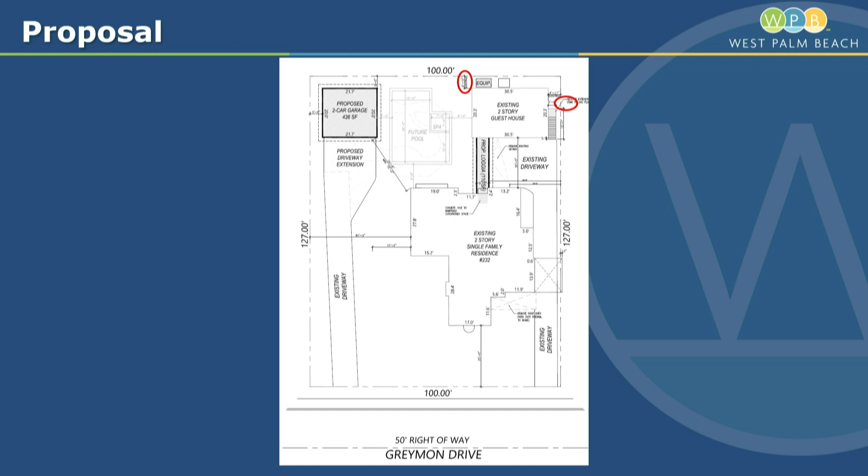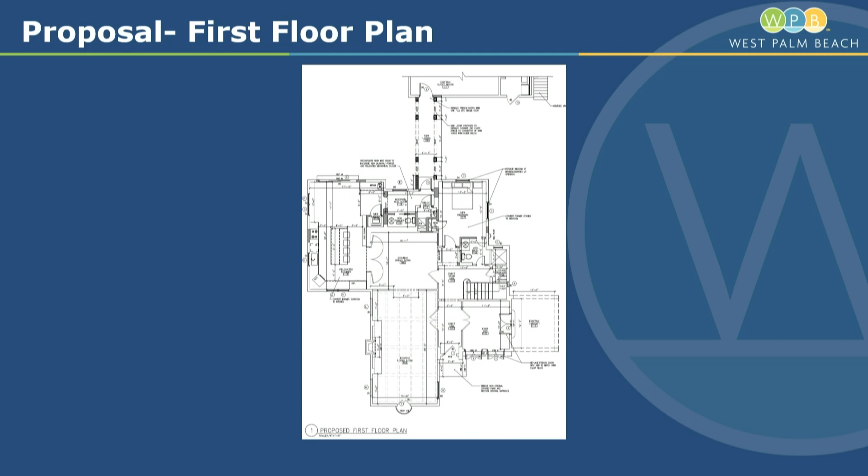This is the existing first floor plan and the proposed. Again, not much is added in terms of square feet beyond that sky bridge going to the ground floor. This is the existing second floor plan and the proposed, and the elevations, which the applicant did a very good job of presenting.

Probably the one area I had a little concern about was the sunroom. Obviously not an original feature to the home, but it was an addition to the structure, and by removing some of the fenestration on it, it seems to read like a different addition and doesn't quite reflect the history of the site. That's the primary reason I wanted a few more windows on that kitchen, though I don't have any requirement for it to remain as a sunroom.

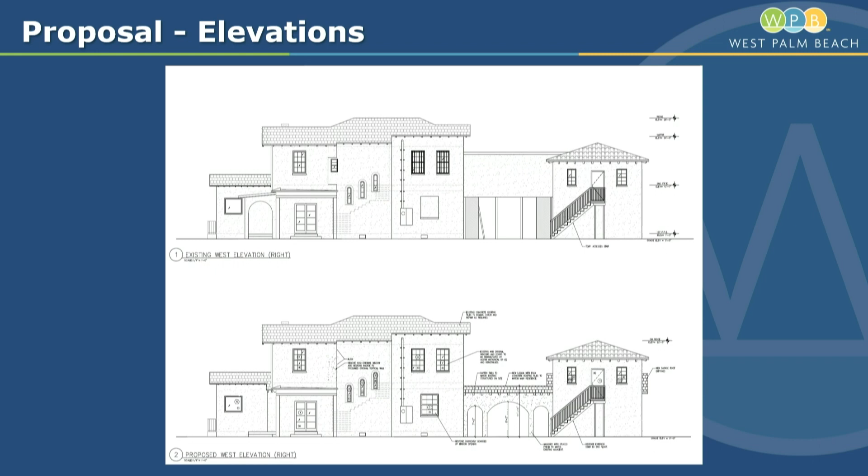These are the west elevations, existing and proposed, particularly showing that sky bridge moving down to a ground story connector. The south elevation, the rear, with the guest house removed for more clarity, and then the east elevations.

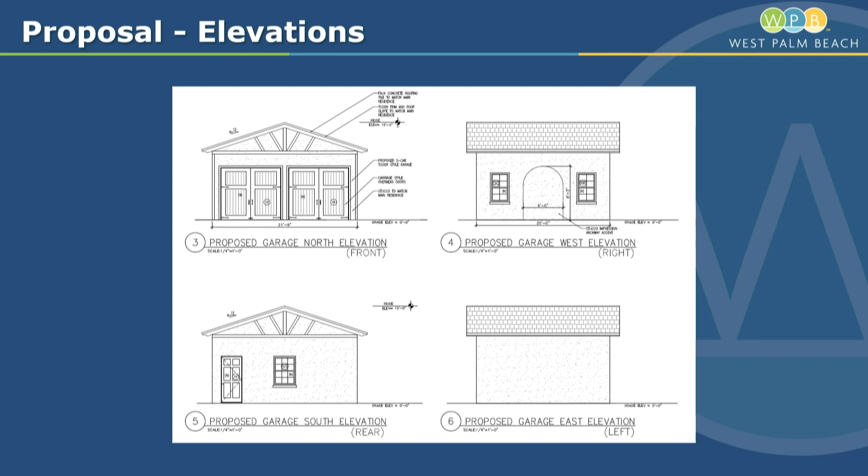And then the elevations of that garage structure. Staff felt that the request for building an accessory garage structure, rather than attaching it to the home, was more appropriate. Generally attached garages are not as preferable as a detached garage, so I think that is a good solution if the applicant requires space for cars, as most people do nowadays.

This is the existing connector. It obviously is not the most well constructed. However, based on the green card evidence, it has existed since at least 1962, probably not since 1952. It doesn't show up on the Sanborn map, but for as rickety as it is, it's apparently been existing a lot longer than you'd expect. That was originally a garage apartment. I think the garage has now been removed and it's just a guest house.

We are recommending approval for both the variance, because it does meet 10 of the 10 variance standards, and approval with conditions for the HPB case. As the applicant spoke to, one of the conditions was changing that sliding glass door, which is not an original feature, to a French door, adding a few more windows to the former sunroom, and providing information on green building strategies. There was an additional condition about the front French doors and possible opalescent glass. After taking photos for the meeting and walking up to them, I don't believe that glass is original. I think it was probably originally clear glass, but it was hard to tell from real estate photos, so I'm recommending removal of that condition.

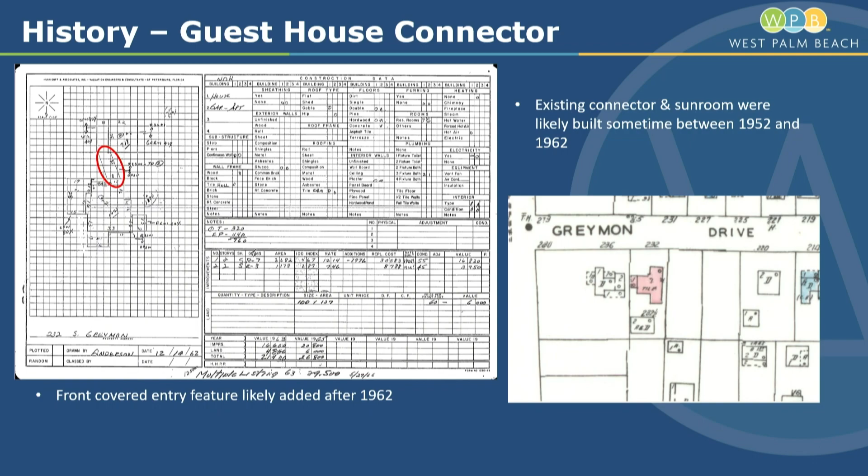I just wonder, given the uniqueness of this style for our district, and in general, if a different roofing material would be appropriate. Does a Tudor style typically have outriggers? Well, that's why I don't really feel like it's a Tudor style, I feel like it's a mission, like a Tudor influence. But I don't know — I've been thinking about it since you first posed it, and I think it probably was barrel tile, especially since the back building is barrel tile. It's like they built the sky bridge, added that opalescent glass, made it a little 60s, and probably redid the roof.

I think it's Prospect Park, but it's similar, and it does have barrel tile on it. You're talking about the Fazio on Washington? Mm-hmm, there's certain massing about that I just see similarities to.